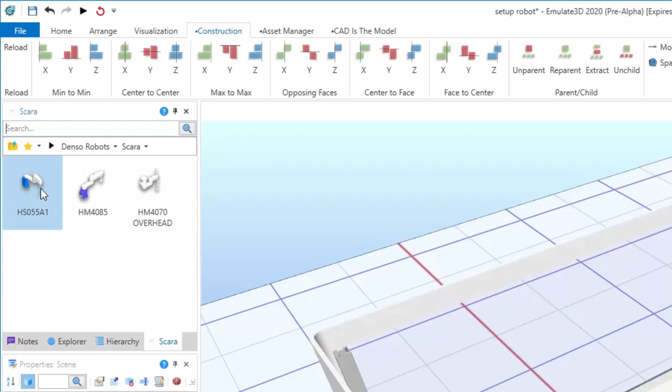A library of Denso robots will be presented from within the Emulate3D application, just like the other material handling automation components. To install a robot, simply drag the selected robot from the catalog into the Emulate3D model space and position as needed.

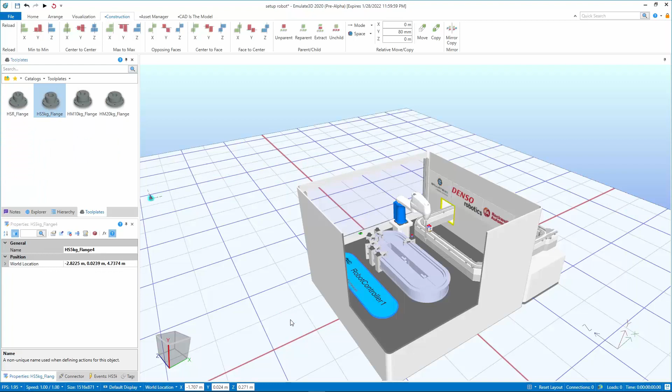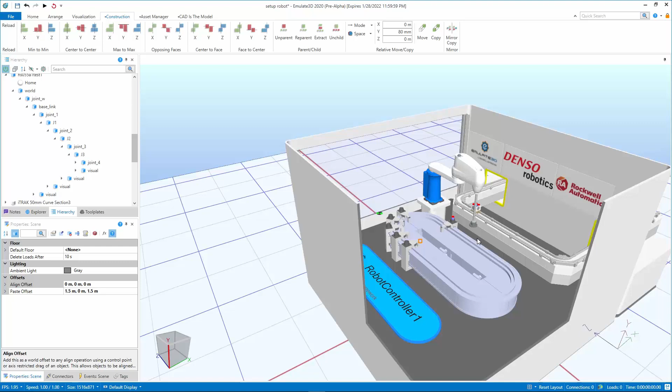Next, we'll need to select an appropriate tool flange that will be used for mounting the end-of-arm tool to the robot. The tool flange is added to the hierarchy of the last joint of the robot. The tool flange has a connector feature that allows for quick connecting of different end-of-arm tools.

Next, we'll get an end-of-arm tool from a catalog and drag it near the tool flange. When we get the tool close enough to the flange, it will automatically snap into place because of the connector feature. Any custom end-of-arm tooling can be used and may be added to custom catalogs for future applications.

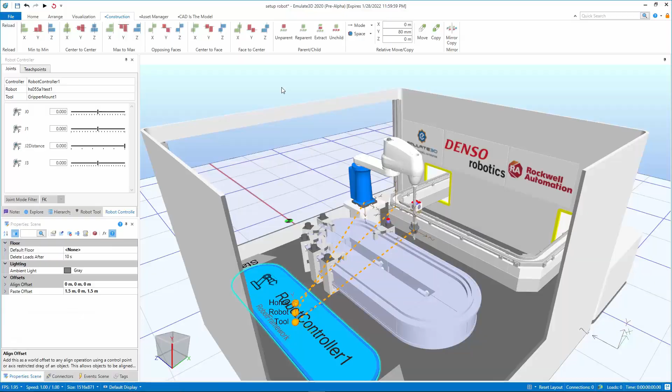With the mechanical elements installed, it's time to connect the Emulate3D Robot Framework Controller and run the model to see if we've installed everything correctly. Watch as the robot moves to position the tool center point to the home teach point.

In the Emulate3D environment, we can control the Denso robot movements with a variety of methods. In this demonstration, we'll use visual teach points. The Robot Framework Controller provides an interface for adding and naming new points as we command the robot to different positions. Here we'll teach 4 new points as pick, pick pounce, place, and place pounce.

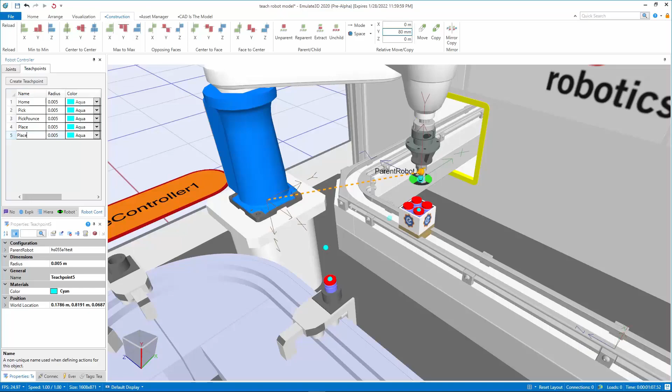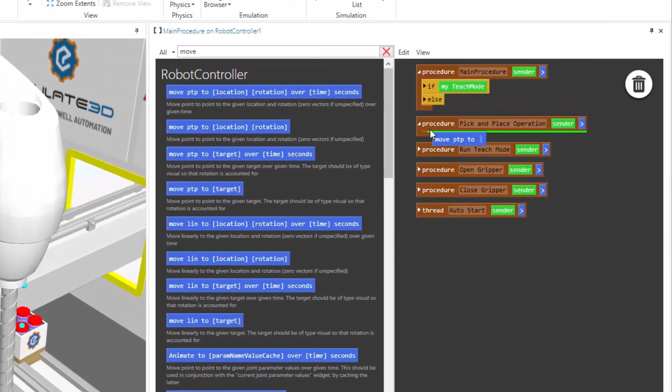The Robot Framework Controller has a quick script drag-and-drop programming interface where we can build the sequence of operations. Here we'll use move commands and recall the different points that we've taught the robot. The teach points are 3D visuals with their own location and orientation properties. When we command the robot to move to a teach point, the move command extracts both the location and orientation from the given teach point.

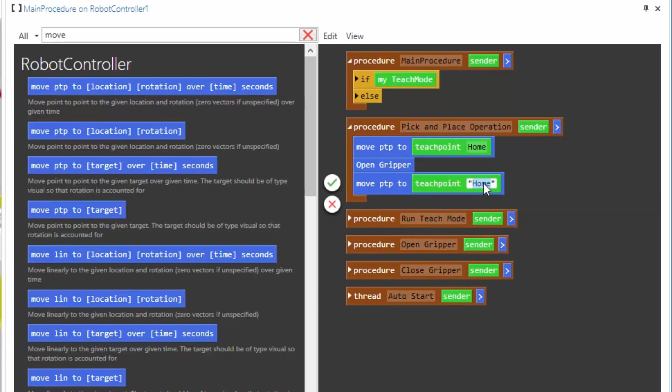The open gripper and close gripper commands are subroutines within this robot program, which command the mechanics of the given tool and can be called as needed.

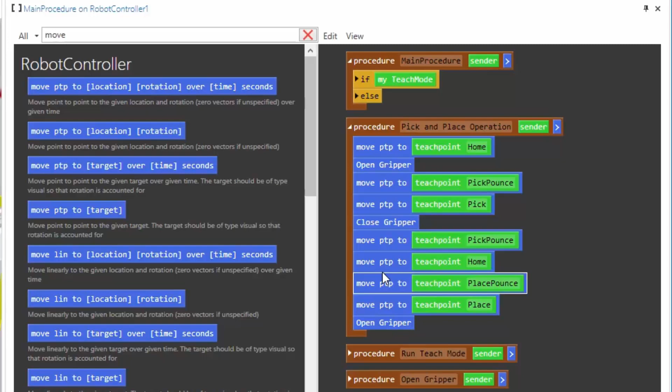With our pick and place sequence programmed, we can now run the model to watch the robot perform the actions. The program executes the sequence from top to bottom, suspending at each command line while the command completes. Note, where needed, the programming interface does support parallel operations.

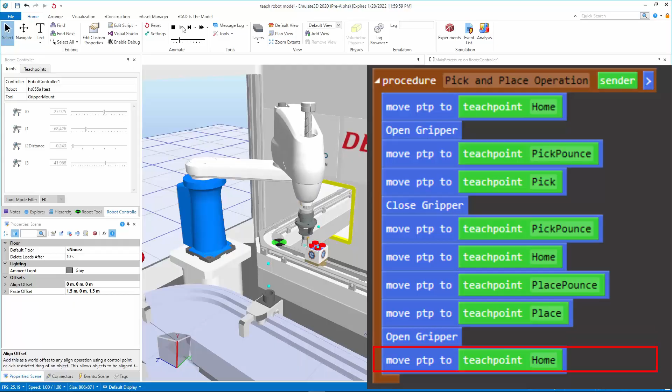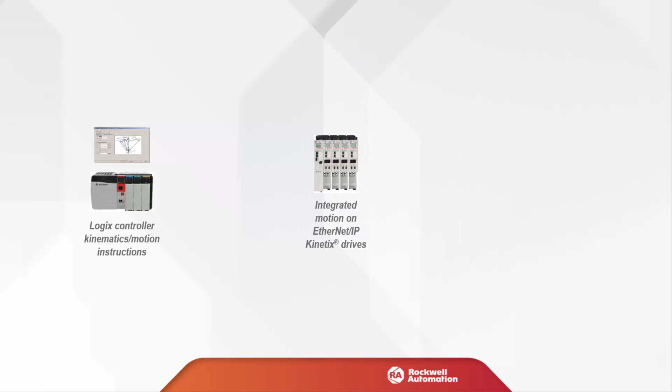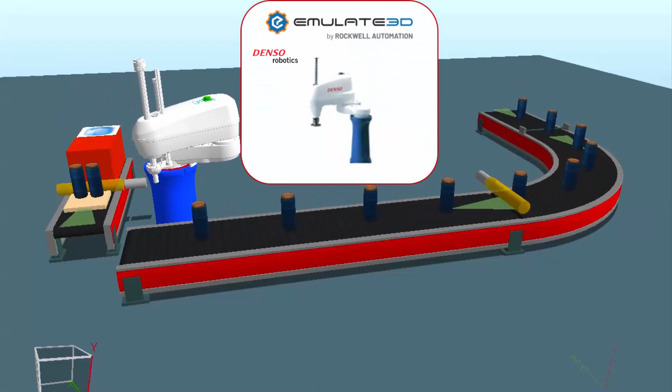Through Rockwell Automation's integrated robot solution with Denso Robotics, the robots can be directly controlled with Studio 5000 programming and integrated motion on Kinetix drives. The digital machinery in Emulate3D can be driven by both simulation logic from within the model and by connected PLC controls. The Emulate3D model contains Denso's physical description of the robot, and the Logix controller contains the logical description of the robot. We connect these two truths together for virtual commissioning of the whole integrated solution.

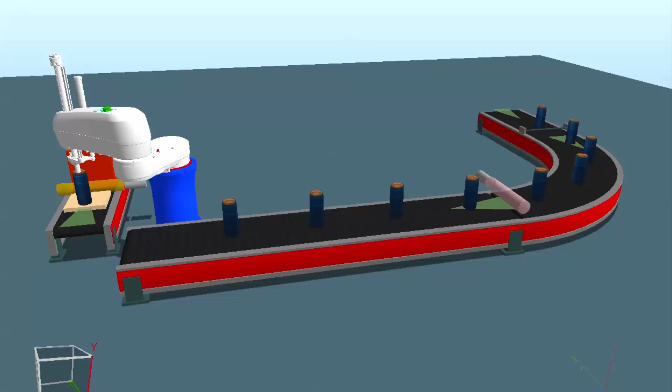In this system, containers are conveyed to the robot. The containers are registered to the PLC controls by a signal from this virtual sensor, and are position tracked until the robot picks them. The Logix program solves the inverse kinematics of the robot geometry to satisfy the target positions and runs the motor drives to execute the motion of the robot.